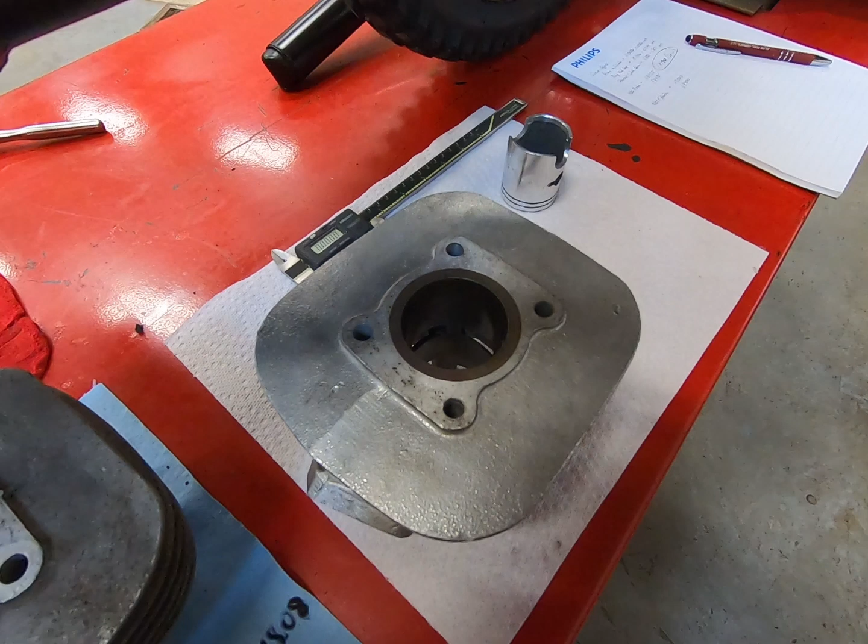Hey, welcome back, guys. So, my NOS cylinder and my NOS piston have come in the mail. I'm still waiting on the piston rings, but even before I get the rings, one of the critical measurements to make sure everything's going to work is what they call piston skirt to cylinder wall clearance.

Okay, you have a solid piston, but at the bottom you have this skirt, and pistons are purposefully made kind of smaller up top than they are at the bottom, because this is where all the heat happens and it dissipates, so it gets down to the skirt. So this will expand more than the skirt will. So this dimension here is the critical dimension, because this will expand more than this will.

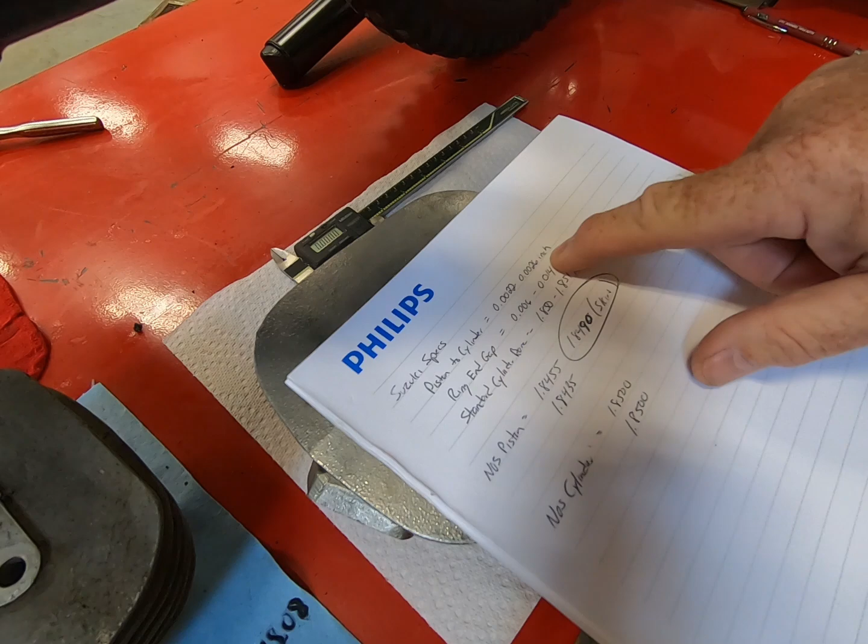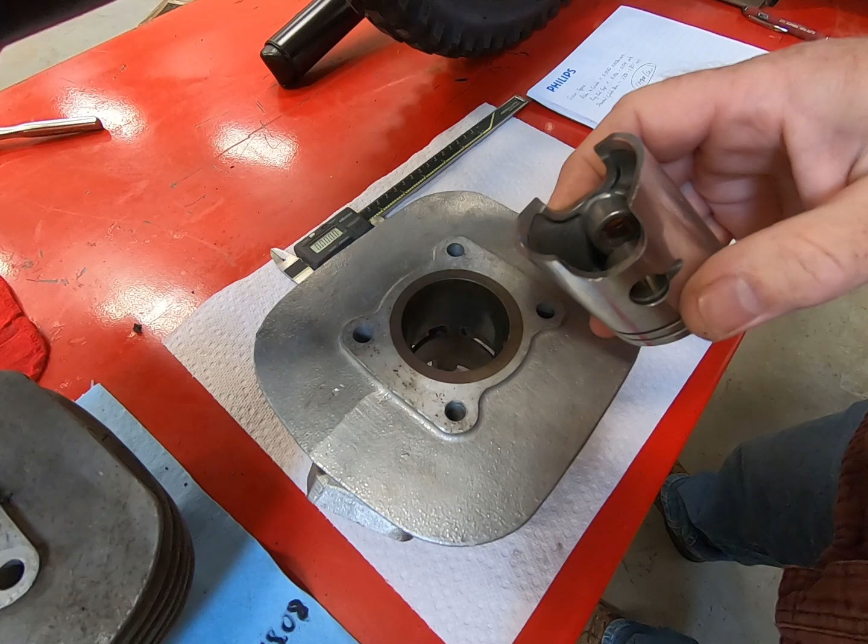So according to the Suzuki manual, we want a piston skirt to cylinder clearance of 0.0022 to 0.0026 inches. Okay, I already made measurements, but I'm going to show you how I did them. So the skirt is easy. Okay, we're going to take our calipers. Let's see if I can get this. You want to measure 90 degrees from the pin, because obviously that's the only place you have the skirt, and about 3/4 of an inch down.

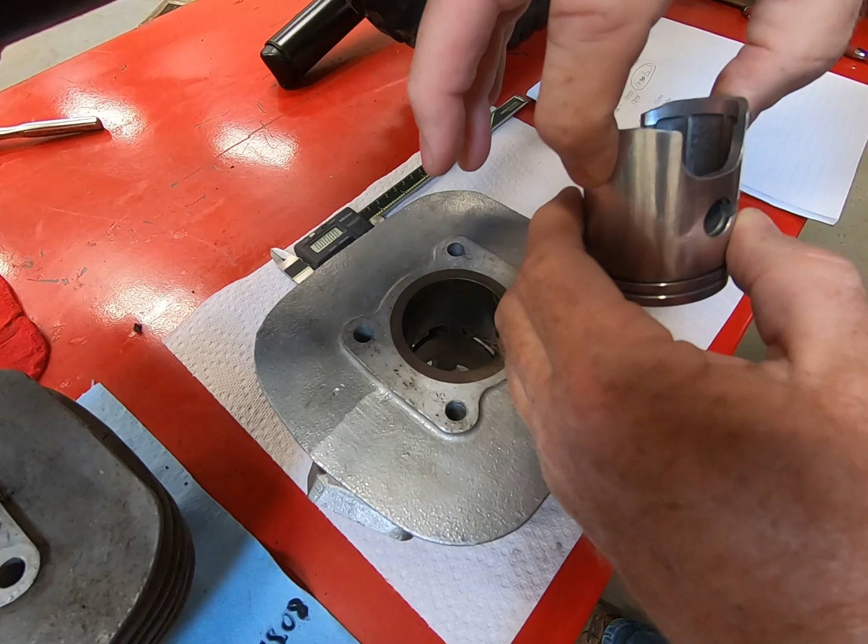All right, so we're going to come down here. We're going to measure this, get it 90. All right, so right there is a good measurement, and you can see we are at, oops, hang on, can't do that. We are at 1.8490, I hope you can see that. All right, so I wrote that down, 1.8490 for my skirt. Okay, now we put that aside. And I know some people are going to say you should use micrometers. For what we're doing, this is going to be fine.

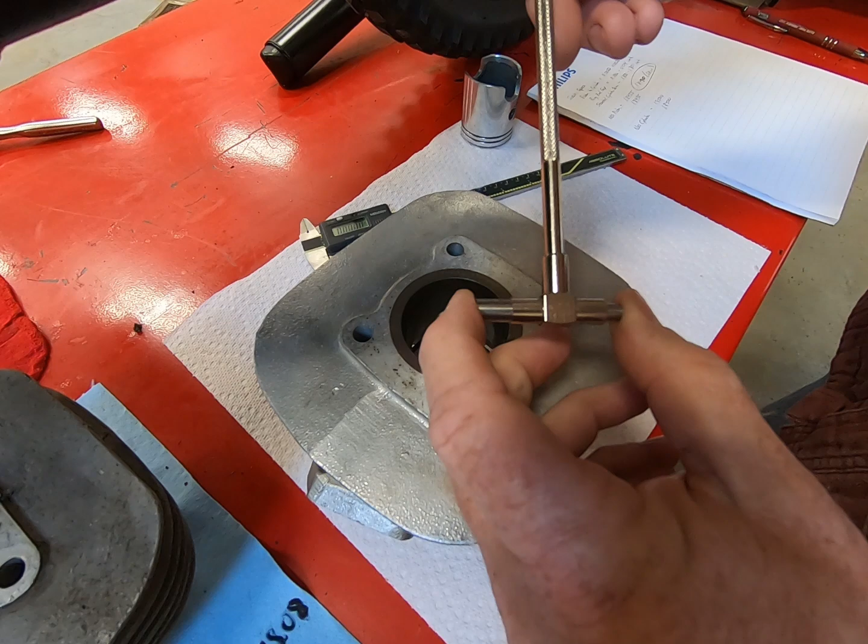So here is a bore gauge. I have a kit that has different sizes. This is the size for this type of barrel, which is roughly 47 millimeters. So what you do, this tightens it, and these are spring loaded. And then when you get it where you want it, you can tighten it and it holds your measurement. Okay? Because the critical condition is the skirt, and the piston is going to be inserted this way with the arrow towards the exhaust, so that's the skirt side. Okay? It is tight.

So I'm going to go down about an inch into the cylinder. So what you do is you get it in, tighten up your spring, and then as you rock it forward, it will compress in, and eventually you'll go past center and it'll get loose. Okay? I like to tighten it just to make sure. All right, now we'll measure this.

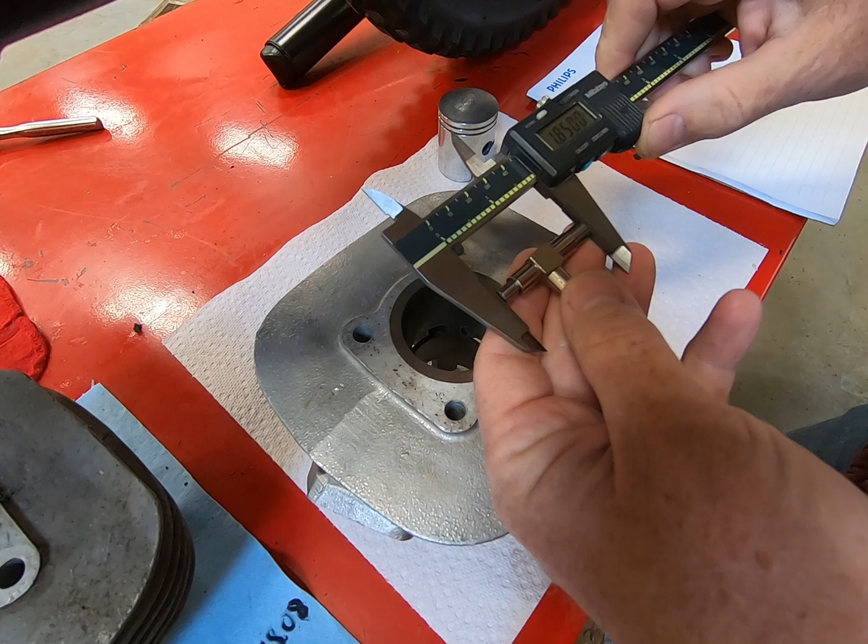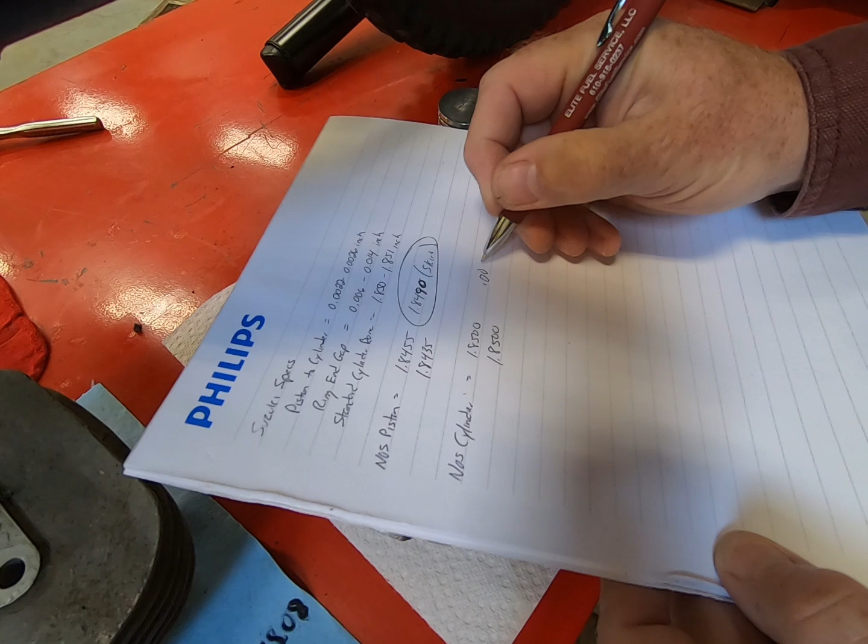So our cylinder is about 1.85. Okay, 1.8500. So 1.8500 and 1.8490, you subtract those, and you'll get a difference of 0.0010. Obviously, that is way too small, because I need at least 0.0022. All right. So even though these are NOS, you should always measure this, and I always measure them more than once, which I've already done, to make sure my measurements are repeatable.

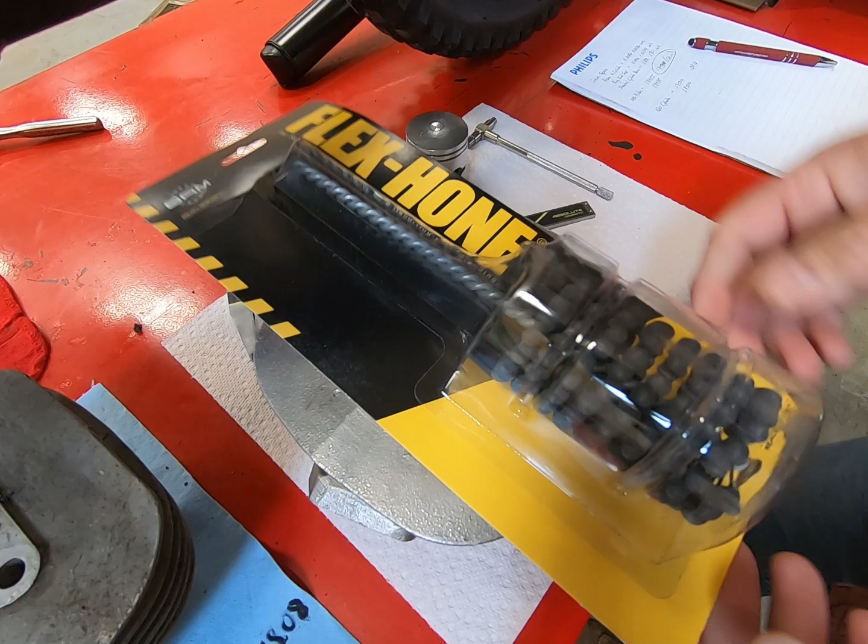So I need more clearance for my piston skirt, and I can even tell when I try to put it in, it is very tight. It's a very tight fit. Now remember, the skirt won't come all the way up to here, but even down there, it's a tight fit. Okay, so what I'm going to do is I'm going to hone this out myself. So I bought a flex hone, ball hone, some people call it. Flex hone is the brand. I'm going to hone this and see if I can increase my gap there a little bit.

All right, so that's how we measure this. You can't just slap this together. If I just slapped this together and just went with it, assuming I have my rings, I probably would seize the engine and I would probably at least ruin the piston, possibly ruin the cylinder to the point of having to get it rebored.

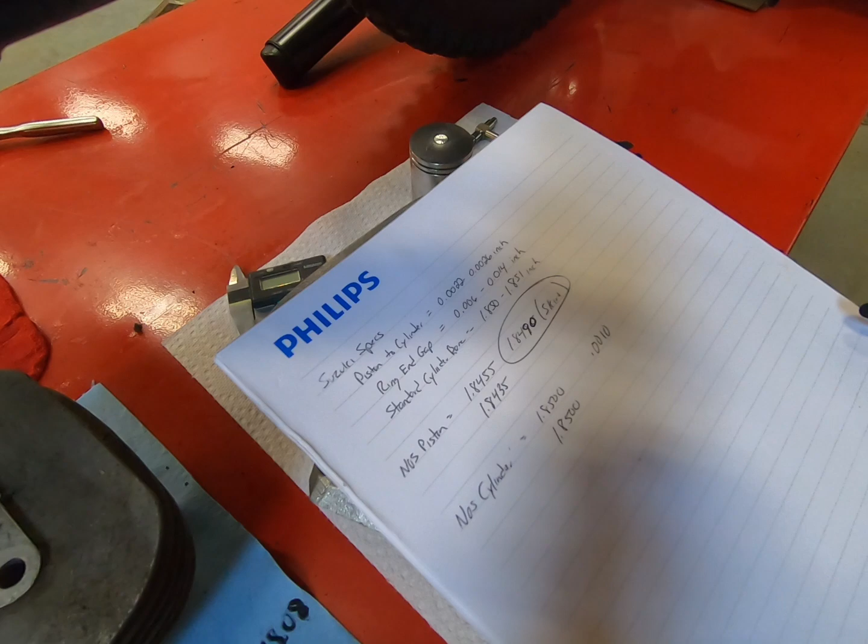Then when the rings come, we'll measure the ring end gap, which according to Suzuki should be from 6 to 14 thousandths of an inch. So we will put those in and I'll show you how we do that when I get the rings. But for now, I'm going to try to hone this and see if I can get my clearances where I want them. Okay. Again, I know there's going to be guys who are going to tell you this is not the most accurate way.

Maybe, maybe not. I've been building engines this way for 40 plus years and I've never had a problem doing this. I mean, we have some decent gaps. You know, if I'm off a thousandth of an inch, it's not going to matter. Okay, so this is how I do it. Feel free to do it whatever way you think is best.

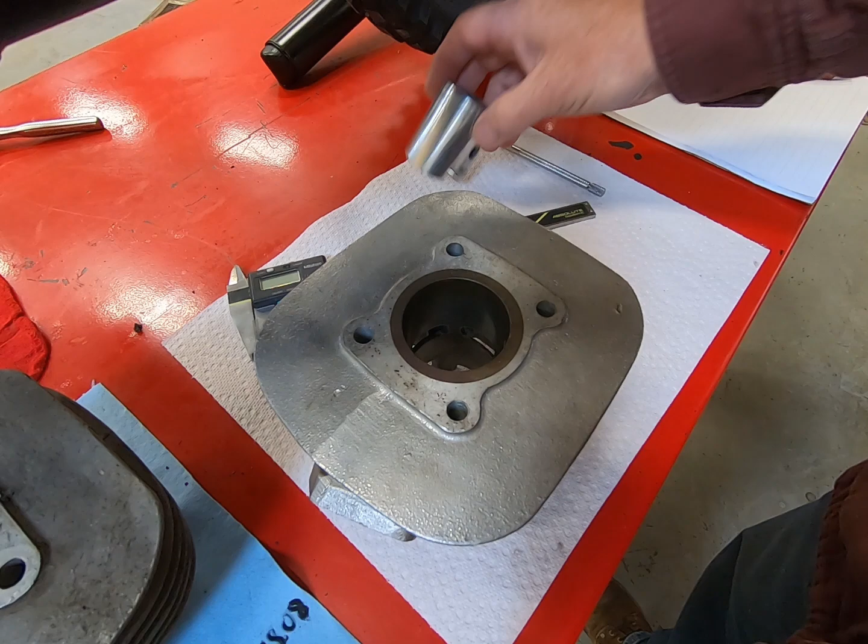All right, until next time. For now, we'll stop here. I'll try to hone these, and after I hone the cylinder, I'll bring you back and we'll measure it again and see how we made out.

All right, welcome back. So sometimes you just have to know when you need a professional. I used my ball hone or flex hone, and I honed on this for quite some time, and it's just not coarse enough to make that big of a difference as far as opening up my clearances enough. I got one hell of a nice crosshatch though.

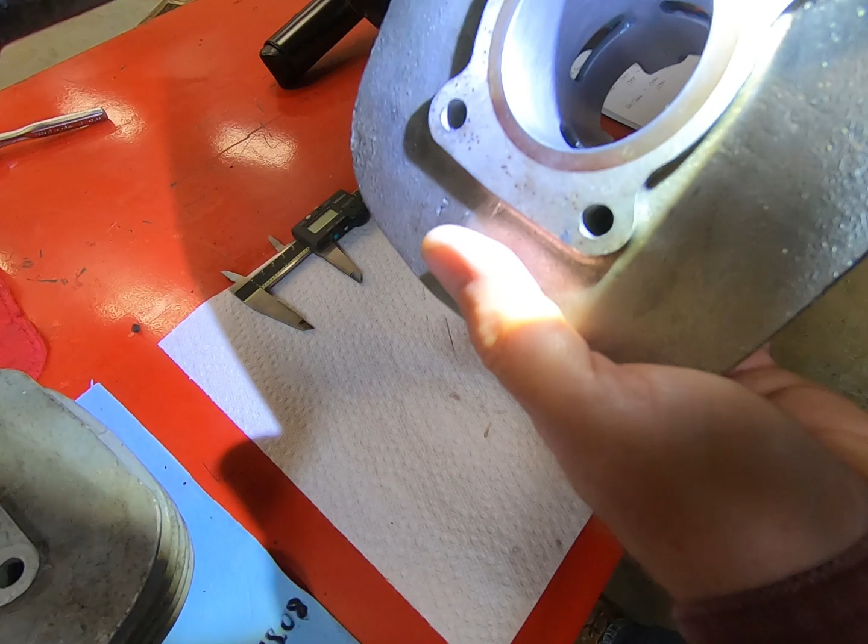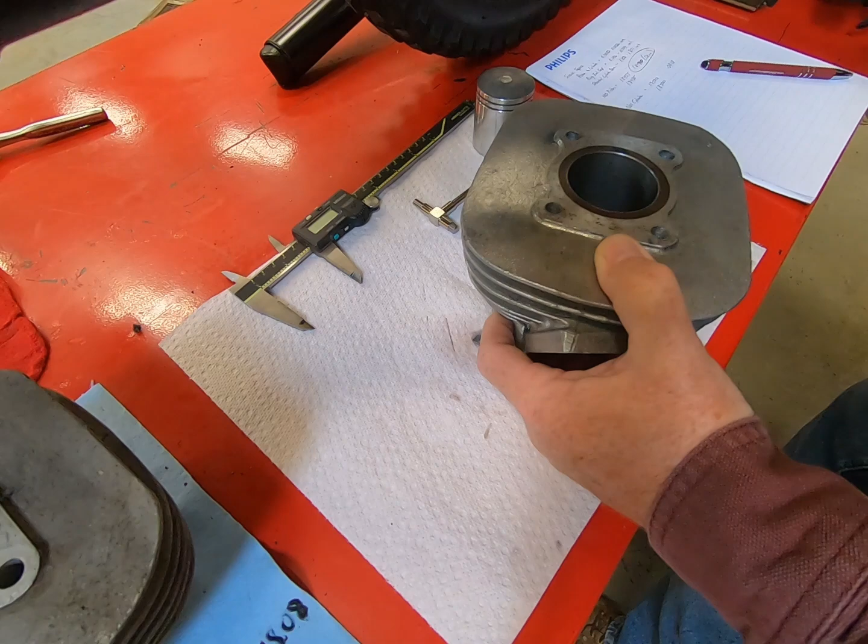I don't know if this will show up that well on the camera or not, but I got a really, really nice crosshatch on it. I'm not sure how well this will show up, but excuse me. I got myself a really nice crosshatch, but it's just not opening up the clearances enough. Those flex hones just aren't quite aggressive enough.

I was hoping a little bit beyond hope in order to save a little bit of money on this little TC90. But I'm going to have to take this to the machine shop and have him open it up just a little bit. So sometimes you got to know when you need a professional to do something. You can't always do everything yourself, and this is going to be one of those times. I need those clearances opened up more than I can do here at my home shop.

So I gave it my best shot. We'll have to have the machine shop do it. Hopefully I can get a pretty quick turnaround because I'd like to get this bike back together before it gets too cold here. But for now, that's where we have to stop.

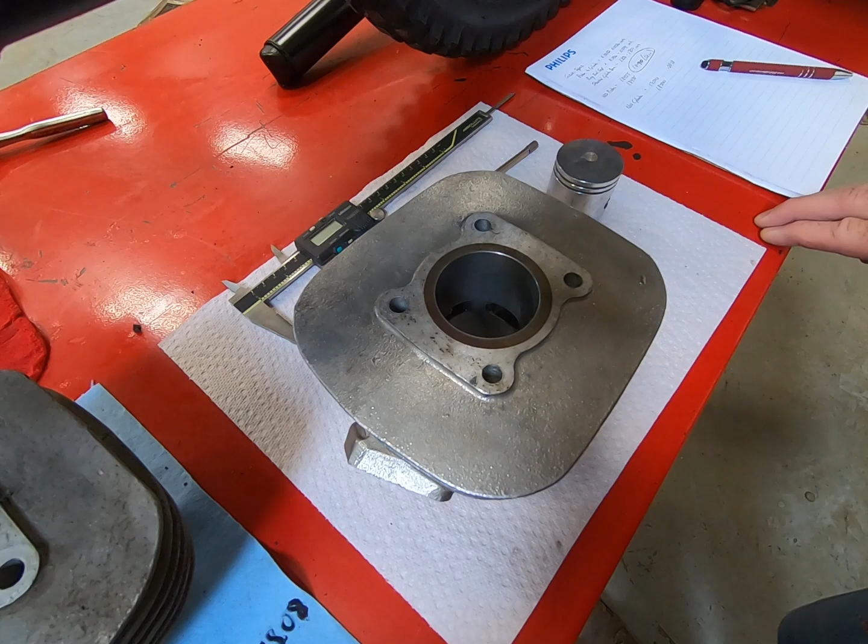Well, welcome back, guys. So I got a good update for you. I persisted with my honing, and after a long time of honing, cleaning, and so on, I finally got it. I was actually able to get it without having to go to the machine shop. I managed to get myself a bore measurement of 1.8515. Of course, the skirt measurement didn't change, which gets me a piston skirt to cylinder clearance of .0025.

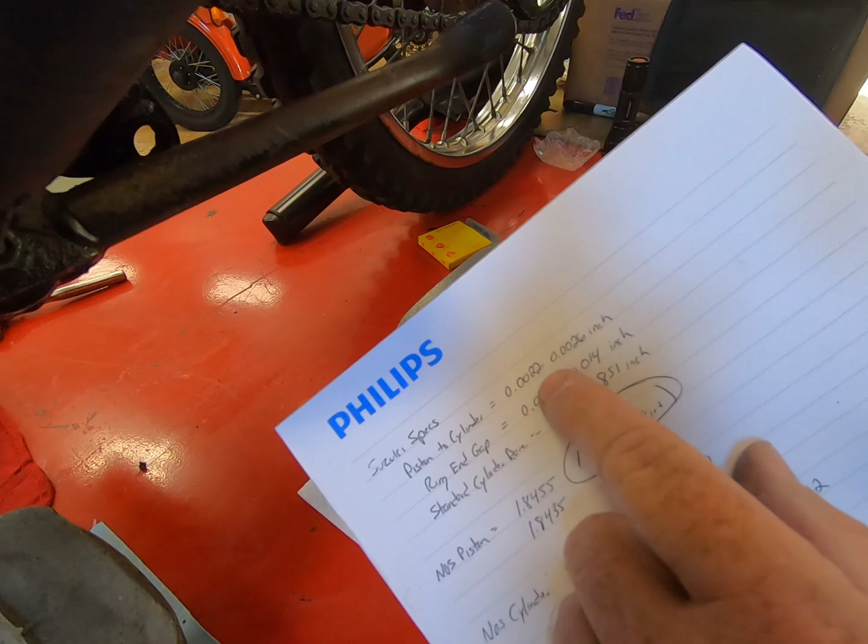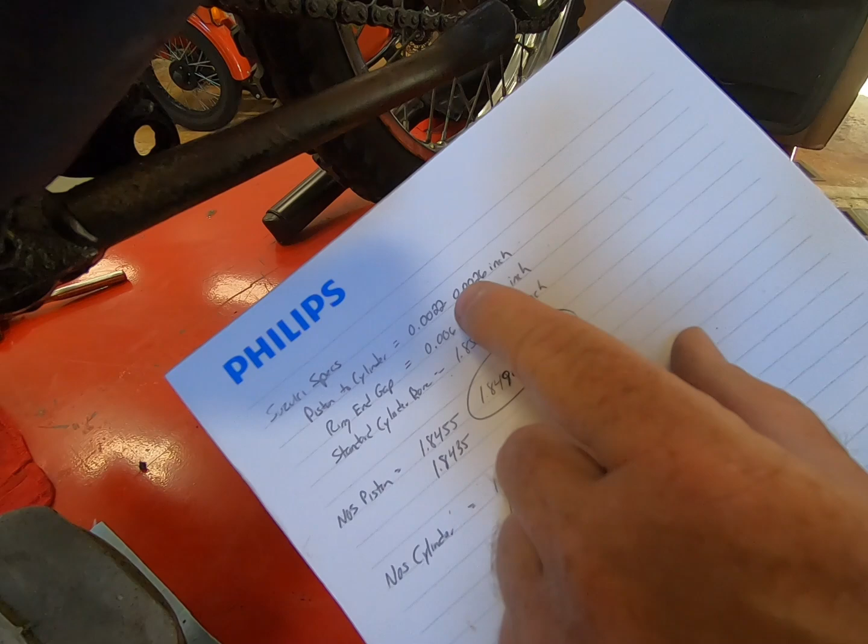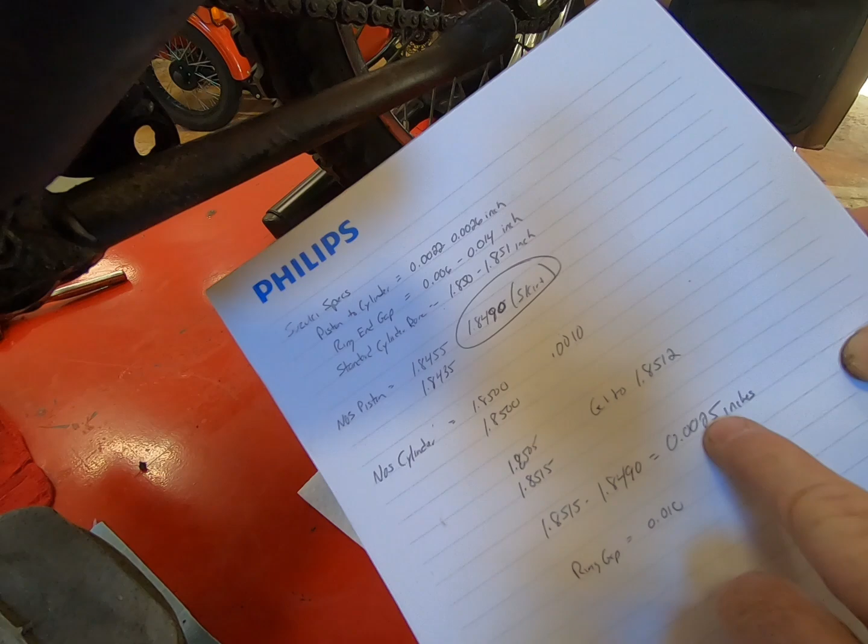I need to be .0022 to .0026. Okay, so I'm good. Service limit, believe it or not, is actually 0.01. So this will be fine. And actually my skirt measurement kind of flops between 8490 and 8495. So it's probably actually a little bit tighter than .0025. So I went on, I measured the rings.

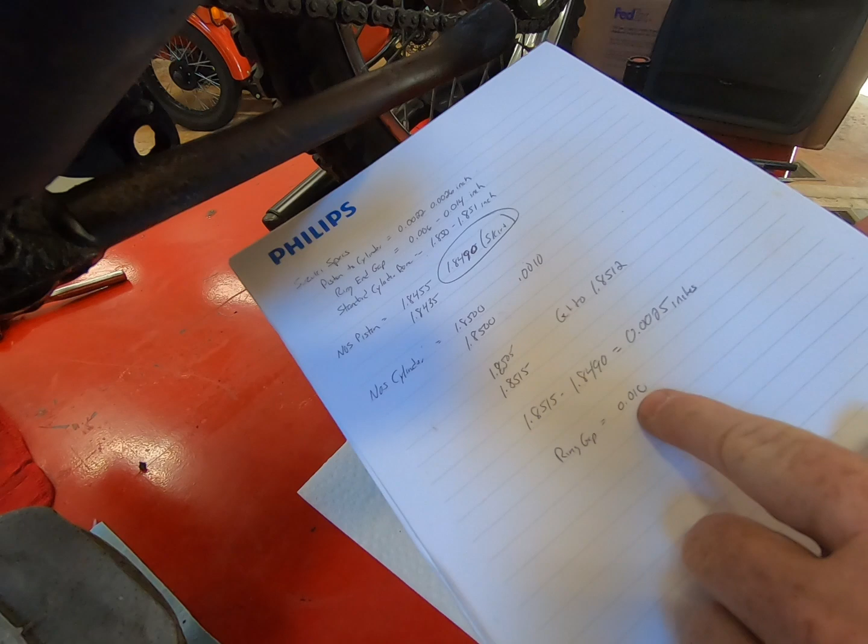The way you do this is put your ring in like this, squeeze it together, and get it down in there a little bit. Flick it over, press it down in. Then use your piston, just put it down in there to where it's square in the bore. Then get your feeler gauges out and measure that gap. And I measured on both my rings a gap of 0.010, and I'm allowed 0.006 to 0.014, so I'm good.

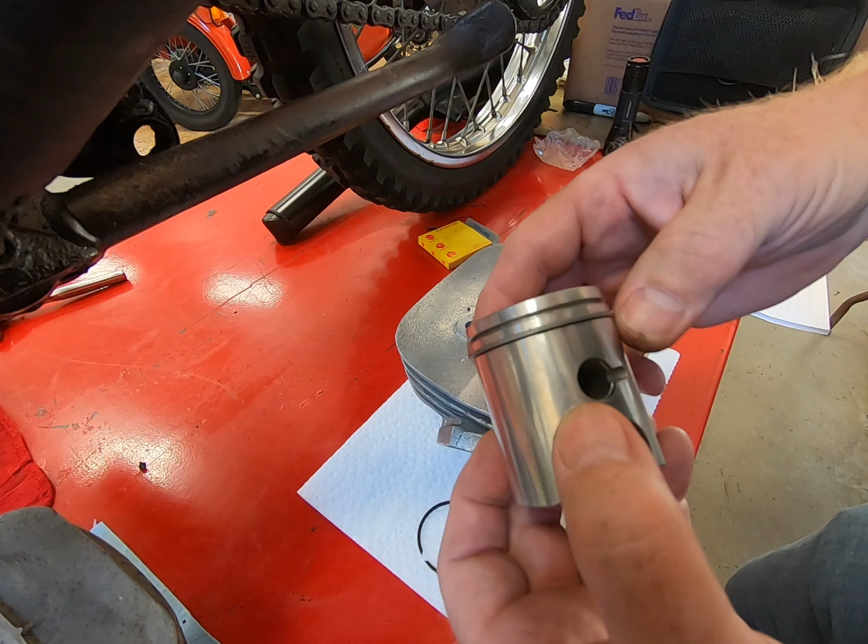All right, so then you just have to put them on the piston. So I put one on already. And these pistons have little tits in them. There's one there and one there, and you want that gap to go there, and that way when they close, that stops the rings from turning. Okay, so you want to keep them there.

And the other thing I do is I put one of my circlips in. You might not be able to see this. I put one circlip in one side so that when I push my wrist pin through, which is here, it'll stop when it hits that circlip and not just go out the other side. I don't have to worry about going too far or anything.

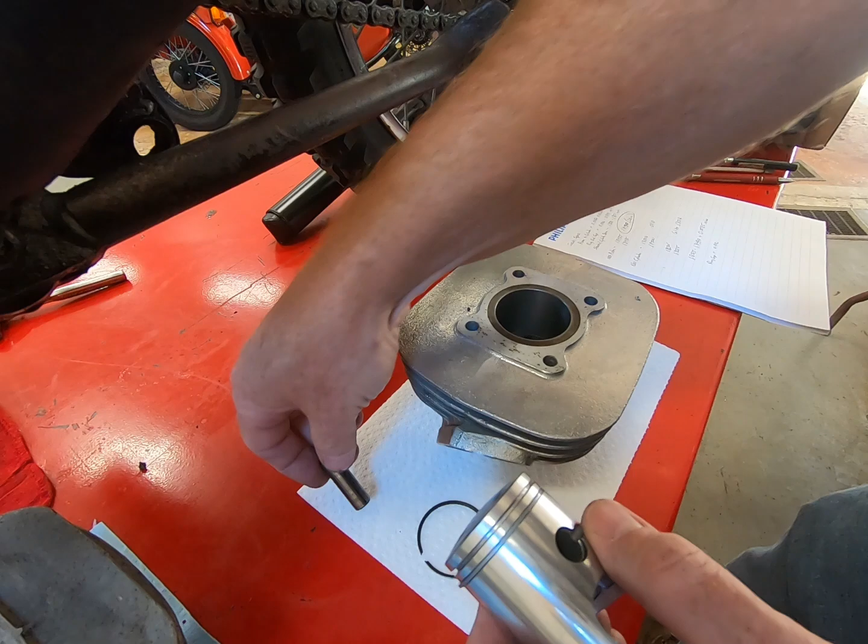So put your piston rings on very carefully. I like to start in the back and then very carefully open these. They're very easy to break, so do not stretch them more than you need to, and work them down into your groove.

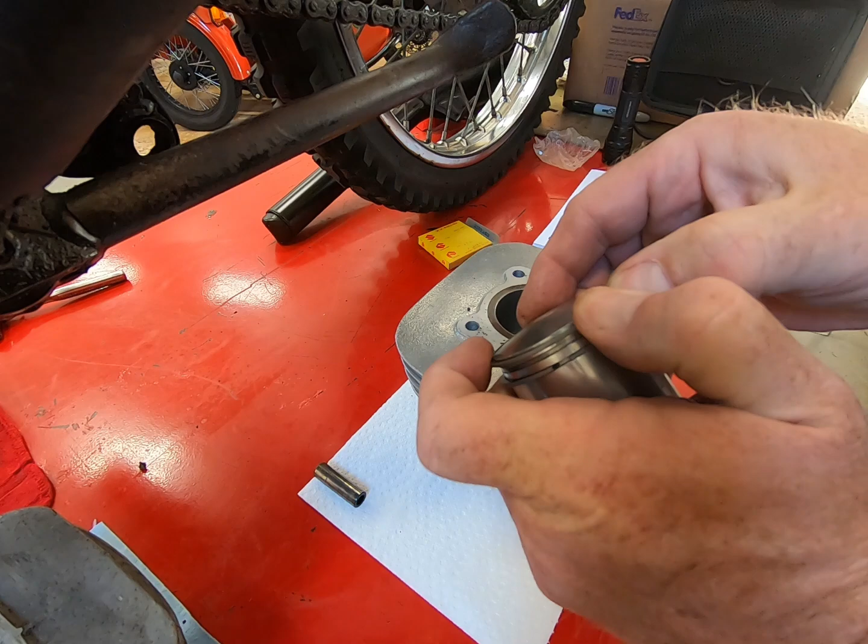Like that. And spin them to where they're between that pin. That one goes there. This one goes there. Okay. All right, and then on your piston you'll have an arrow. That arrow points towards the exhaust, so it's going to go in like this. Okay, obviously up from the bottom, but you get the point. So you want your piston arrow to point towards the exhaust.

Okay, so the next step is I'm going to put the piston on my connecting rod. I'm going to make sure my rings are in position, and I'm going to get a ring compressor to compress them. I like to put a little bit of oil on, and then I will set the cylinder down over top. But let me get set up for that. I've got to put a base gasket on, get my ring compressor out, and I'll bring you guys back in a little bit.

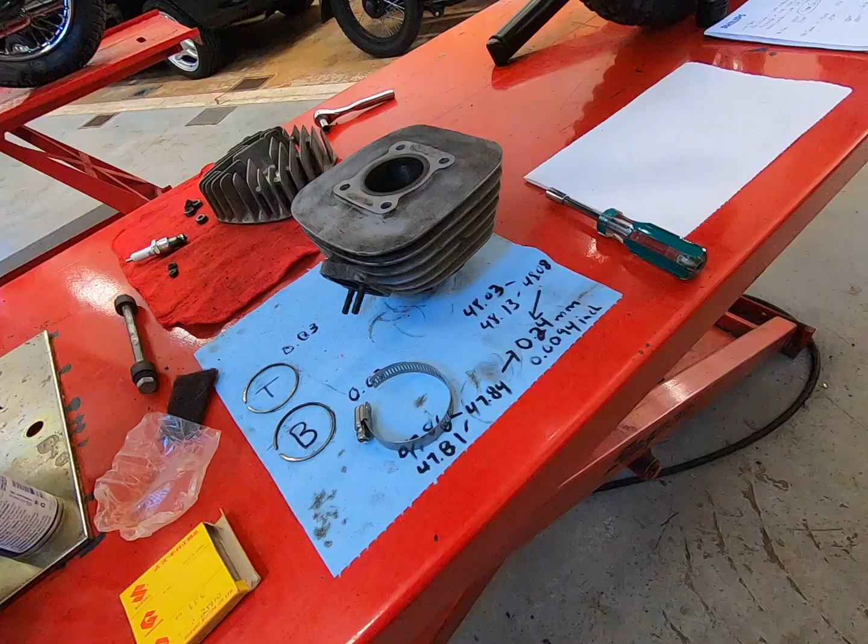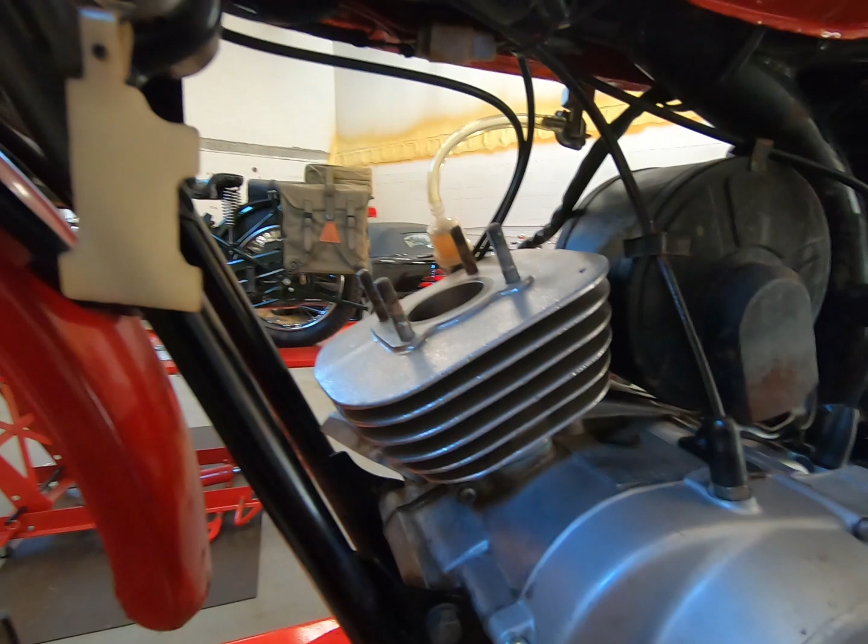Well, unfortunately, I forgot to press record. I thought I was recording this whole time, and apparently I wasn't. So anyway, I got the piston rings on like I showed. I don't have ring compressors that are this small, so what I have is a bunch of these slightly wider clamps. I get my piston rings where I want them, cinch this up, push the cylinder down over top.

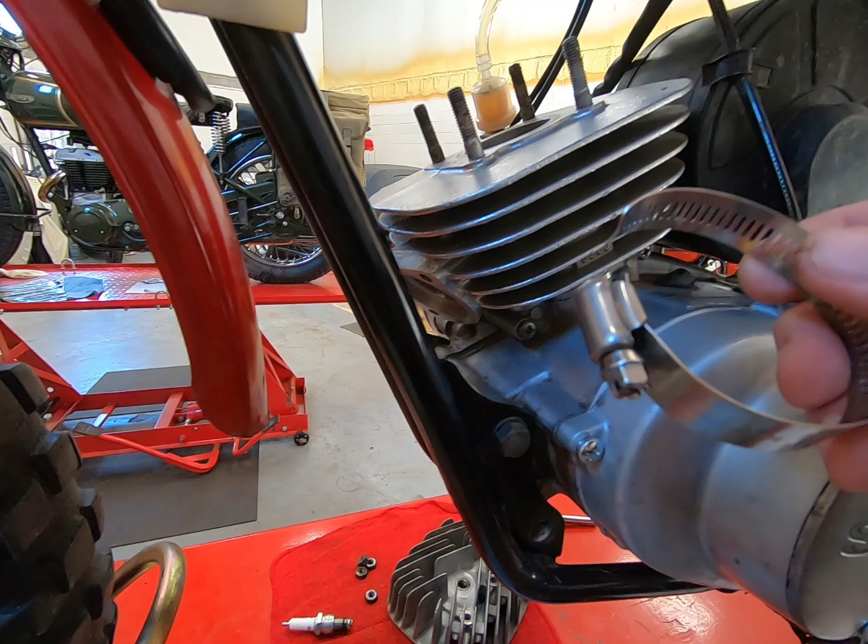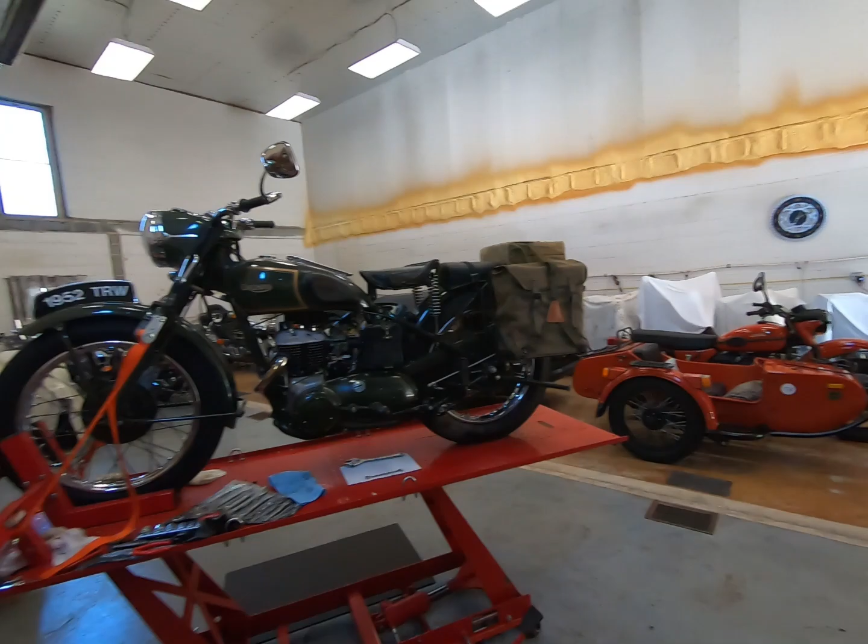I oil both the inside of this clamp and my piston, slide the cylinder down. Then I can undo the clamp and snake it out around the connecting rod, and the cylinder is on. So if I go over here you can see it's got real nice action. So we should be good. All right, so that's on.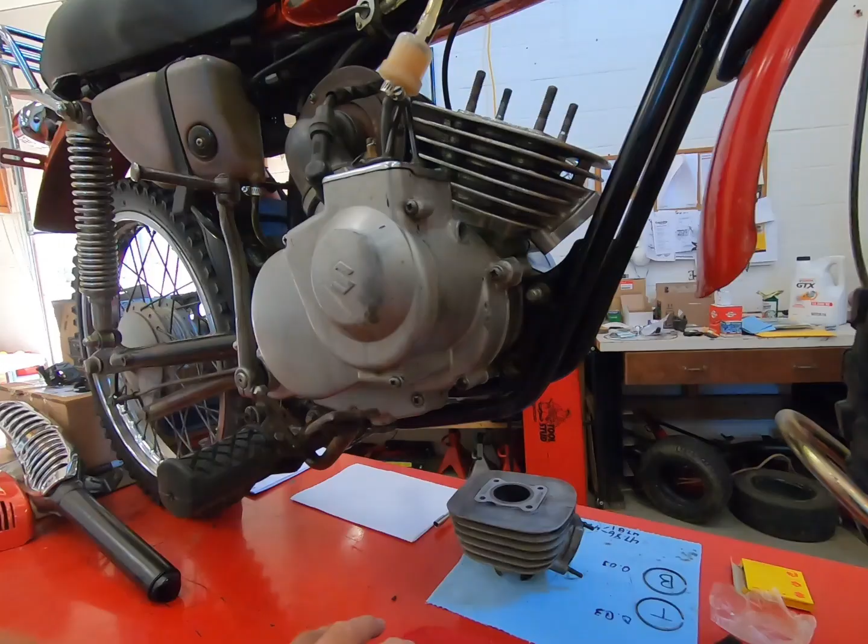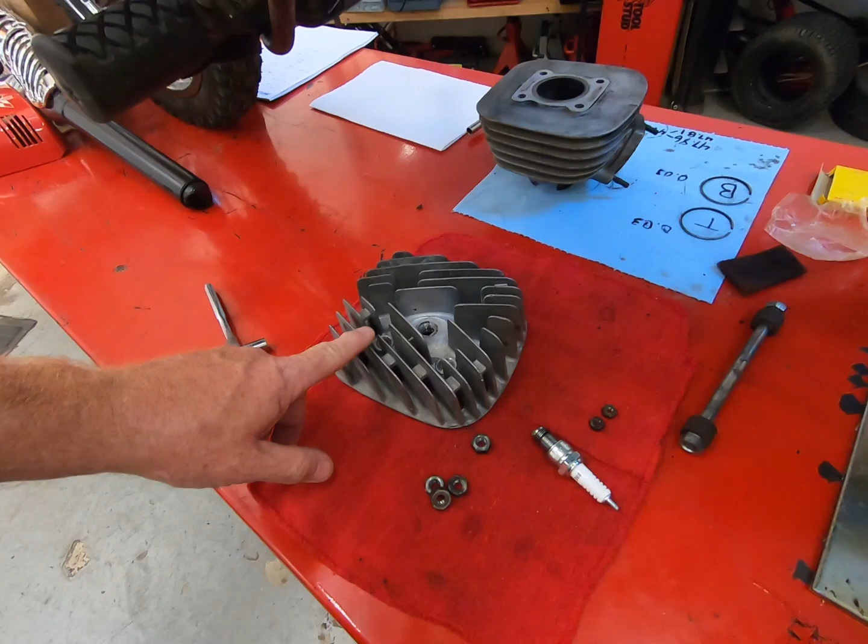The only thing left to do is put the head on. If you've never seen a two-stroke head, there's no valves or nothing. Here's it, I cleaned this up some. There's a lot of pitting in this. I may look for another head. There's a lot of pretty deep pits in it. I don't know if they show up or not, but I think it'll work for now. There's the nuts and stuff for it, spark plug. So just a matter of putting my, I can't forget my gasket.

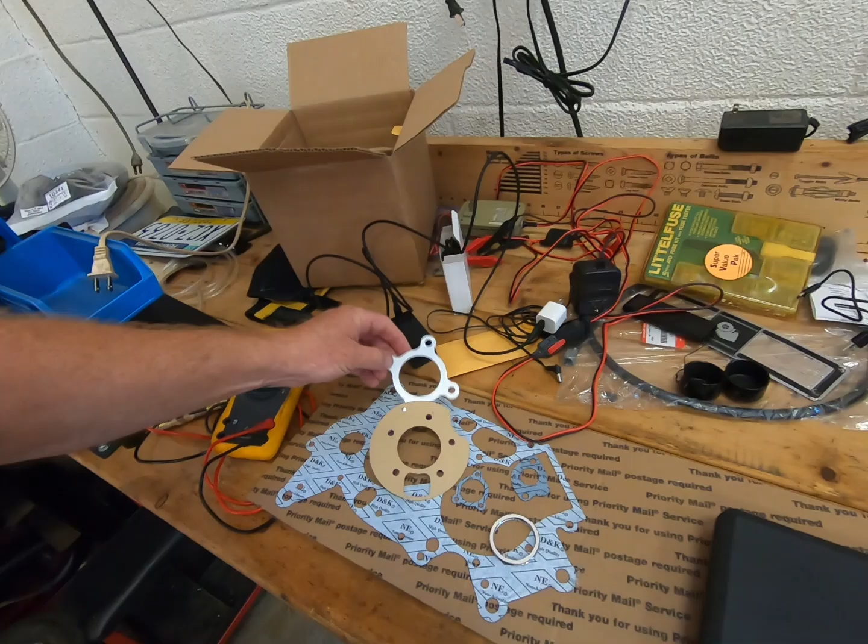Oh, in case anybody's wondering, I did not forget to put the other circlip in. Once you get the pin through, then you put the other circlip in. I stuff rags into the base of the crankcase, so in case that circlip goes flying, it doesn't fall down into my crankcase. Having to disassemble a whole engine for that would really suck.

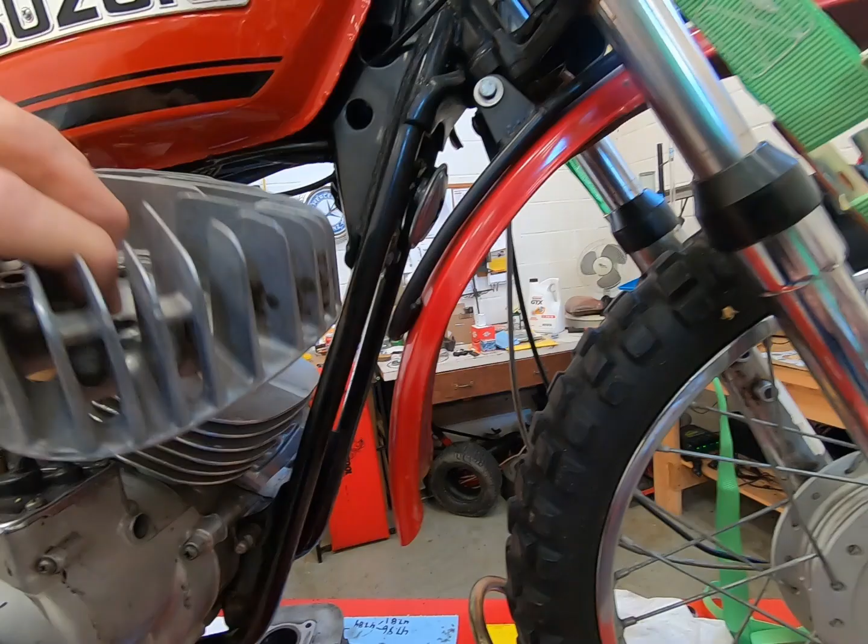So gaskets, head. There we go. We'll put the nuts on. I will look up the torque spec and torque them on. Put my exhaust on. Here's my exhaust, and should be able to test fire it up and see how it does. All right, when I get it all put back together, I'll bring you back for the fire up, see how it goes.

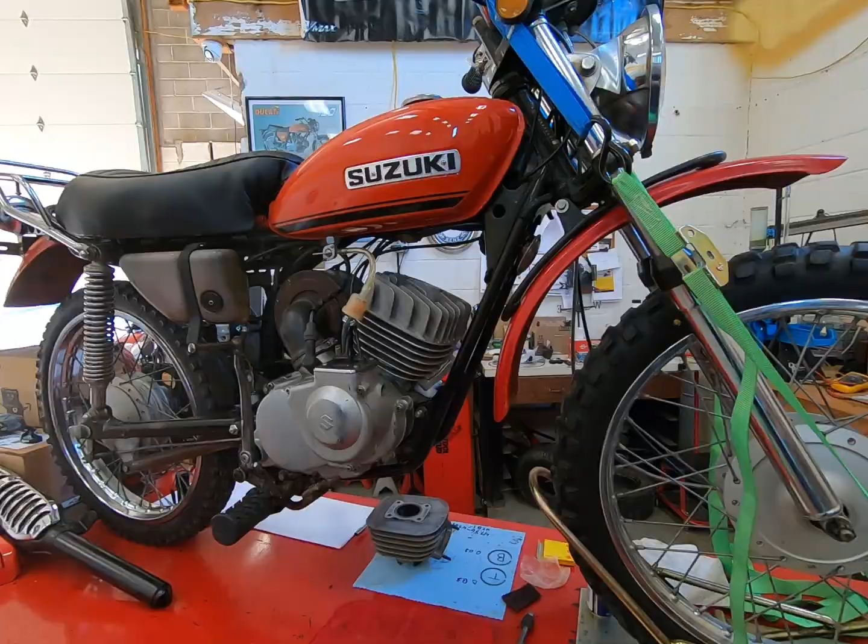Hey guys, welcome back. Well, as you can see, I got it all put back together. Exhaust is on, head's on, spark plug's in. There's gas in the gas tank. I think we're ready to try a start here. Let's see if we can get her to fire up. I already had the gas turned on. And of course, in typical old bike fashion, the carburetor has now decided to overflow and leak. So I have the gas turned off at the moment, but the carburetor is full.

So turn the key on, set the choke. Let's see if we can get her to start.